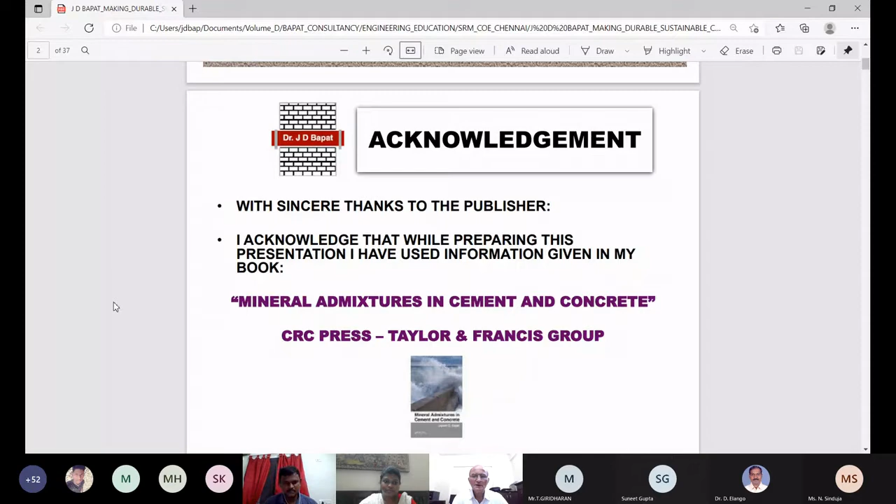What is the meaning of sustainability with regard to cement and concrete? It is conservation of materials and energy and minimization of emission of greenhouse gases and pollutants in all stages. What are the stages? Starting from quarrying of raw materials for cement manufacture, aggregate and transportation, materials handling, unit operations of size reduction, batching, blending, pyroprocessing, packaging and distribution at the cement plant till it reaches the user site. Then placing of concrete and minimization of wastages at all levels in the construction site are the key to ensure the sustainability.

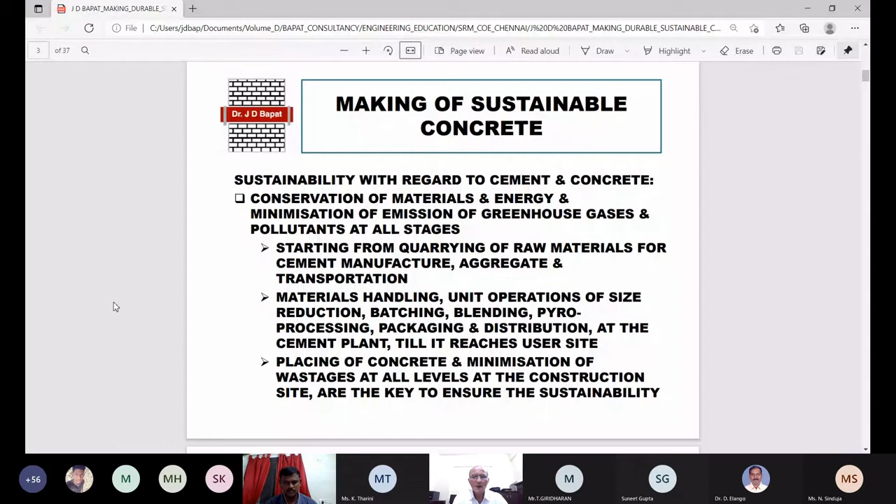Now we are moving on to the next slide.

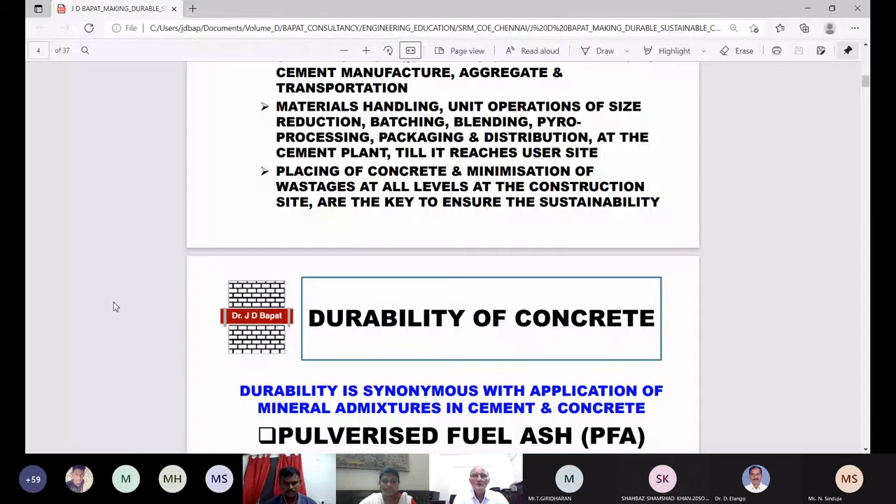Durability. Tarini, there are some people waiting in the lobby. I am getting a message. Sir, I'm admitting them, sir. Some people, sir, are waiting. Yeah, I'm admitting them. Yes, sir, you will admit them.

Durability is synonymous with the application of mineral admixtures in cement and concrete. Now, what are the mineral admixtures which are approved by IS 456-2000? So these are the 5 admixtures which I have given in my slide. They are approved by IS 456, namely pulverized fuel ash, PFA, blast furnace slag, BFS, silica fume, SF, rice husk ash, RHA, and metakaolin.

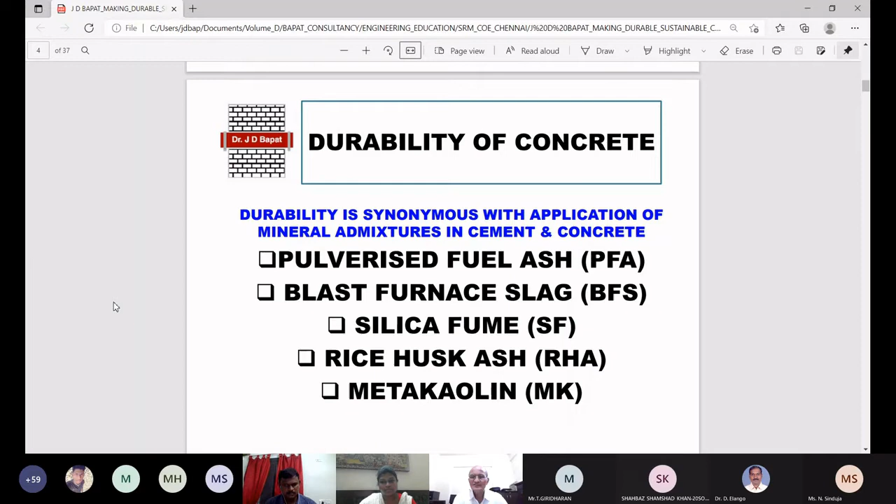When you add fly ash to cement, you manufacture Portland Pozzolana cement, PPC. When you add slag, you manufacture Portland slag cement.

For example, if you manufacture Portland cement, you consume let us say 100 units of thermal energy and 100 units of electrical energy. Now when you make PPC by adding 15% fly ash, the thermal energy comes down to 84, and electric energy is reduced to 89.

When you go to PSC, that is Portland slag cement, the thermal energy comes almost to half, and electric energy is again reduced by almost 25%. So there is a huge saving of thermal as well as electrical energy when you manufacture Portland Pozzolana and Portland slag cement.

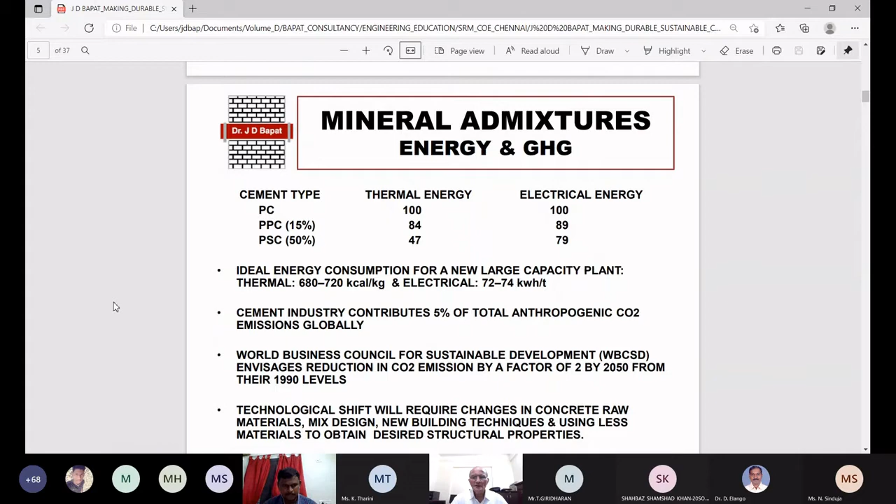Let us go ahead. Now, how do you define durability in structures? It is the ability of the structures to resist weathering action, chemical attack, and abrasion, while maintaining the minimum strength and other desired engineering properties.

Designing for strength and durability is synonymous to designing for sustainability. National standards are mostly prescriptive in nature. They define exposure conditions, design procedure, building materials and their applications, but do not assure minimum service life of structure. This is actually the fallacy of national standards, because they don't assure you what the minimum service life will be if you follow them.

Durability depends on the environment and the quality of concrete. These are the two major factors.

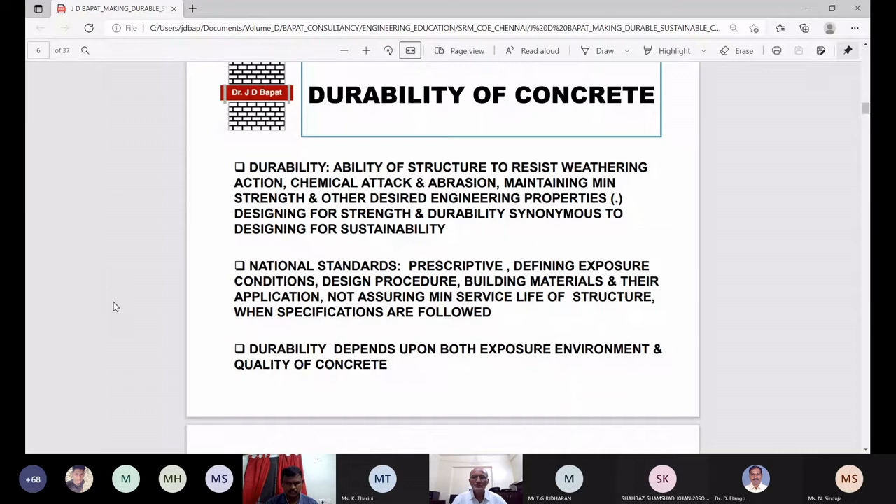Now, how do we design for durability? First, identification of the exposure conditions as per the standards—this is the first step. The next step is proper design procedure and materials choice, including concrete suitable for exposure conditions. Exposure conditions are defined in the standard, so you have to refer to it.

There are two approaches: one is prescriptive and another is performance based. Actually, the performance based approach is not followed by anybody because there are no standards available for it, or they are only partially available. Prescriptive standards are widely available all over the world, so most people follow the prescriptive standard.

The common factors in both approaches are acceptance of permeability as a criterion for durability, quality of construction work, and continuous maintenance of structures during use. These are the three criteria accepted by both approaches.

There are two major faults in concrete construction that can lead to loss of durability. What are those factors? Inadequate cover to reinforcement and inadequate compaction of cover concrete. These are the major factors.

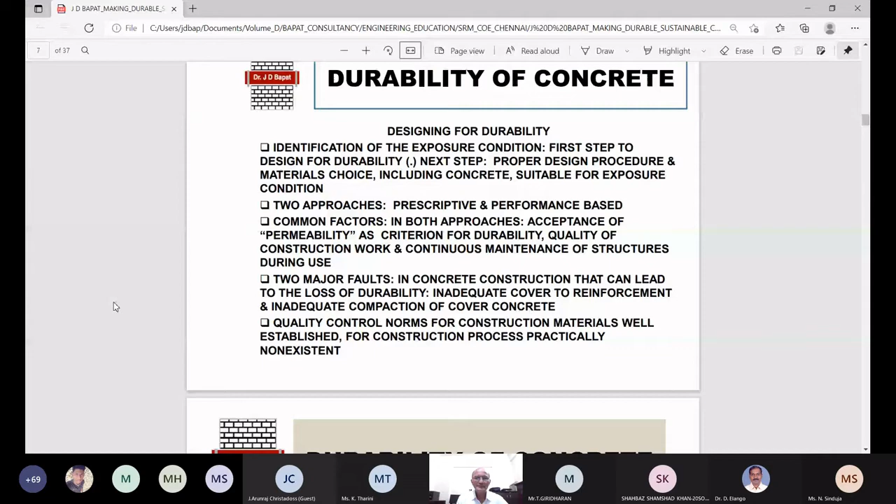Mineral admixtures impart durability and strength to concrete. I have already shown you the 5 admixtures approved by IS 456. Now I am coming to ASTM classification of fly ash. Why am I referring to both ASTM and IS? Because many parts of the world refer to ASTM standards, and ASTM standards are more comprehensive. So it is always better for you as civil engineers to know both ASTM and IS standards.

ASTM C618 and IS 3812 classify Portland fly ash, that is pulverized fly ash or FA, as follows: class F is obtained by burning anthracite coal, or known as grade 1 in IS 3812. Class C of ASTM is obtained by burning lignite coal, or grade 2 in IS 3812. So there is a relationship between the two standards. The former, grade 1 or class F, is pozzolanic, whereas the latter is both pozzolanic as well as cementitious. Later on we will see the difference between pozzolanic and cementitious.

It is also seen that grinding or size reduction operation improves the pozzolanic activity of pulverized fuel ash, PFA, when carried out in a controlled manner. 'Controlled manner' is a very important phrase.

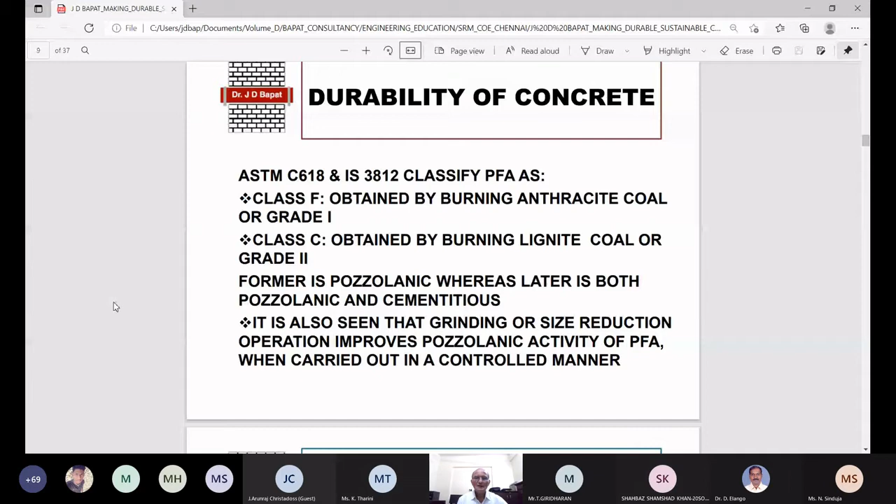Now I am coming to slag. We have seen fly ash, now I am coming to slag grades as per ASTM and the Indian standard.

ASTM C989-09 specifies 3 grades of GGBS by activity index. GGBS is ground granulated blast furnace slag. By activity index, the grades as per ASTM are 80, 100 and 120.

Now when you come to IS, this is a very recent standard, earlier it was not there. IS 16714 specifies minimum activity index of 75 and minimum glass content of 85%.

So you can see the difference. In ASTM standard, glass content is not specified, but activity indexes are specified as 80, 100 and 120, whereas as per Indian standard, 75 is actually the activity index. So there is some similarity between ASTM and IS standard over here.

Now activity, how do we define activity index? It is the average 28-day compressive strength of 50% slag plus 50% cement cubes, which we call SP, divided by the average compressive strength of reference cement cubes, that is Portland cement cubes, which we call P, multiplied by 100. So the formula is slag activity index equals SP upon P into 100.

You get the activity index. Now which is the best? As per ASTM, grade 120 represents the highest strength. Now what is the conceptual meaning of this 120? I will just tell you.

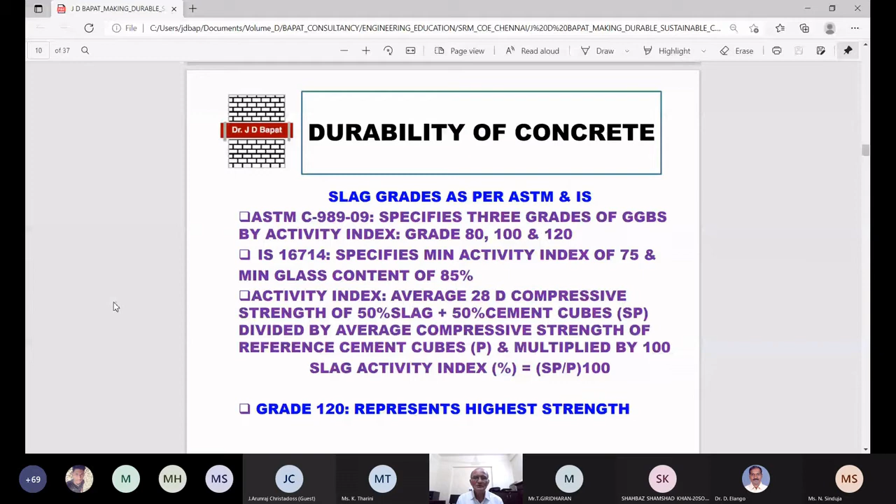So as you improve the grade, you will always see that the amount of material required is less. You are conserving material by using higher grades. Now, how do we analyze the concrete strength? This is shown in this slide.

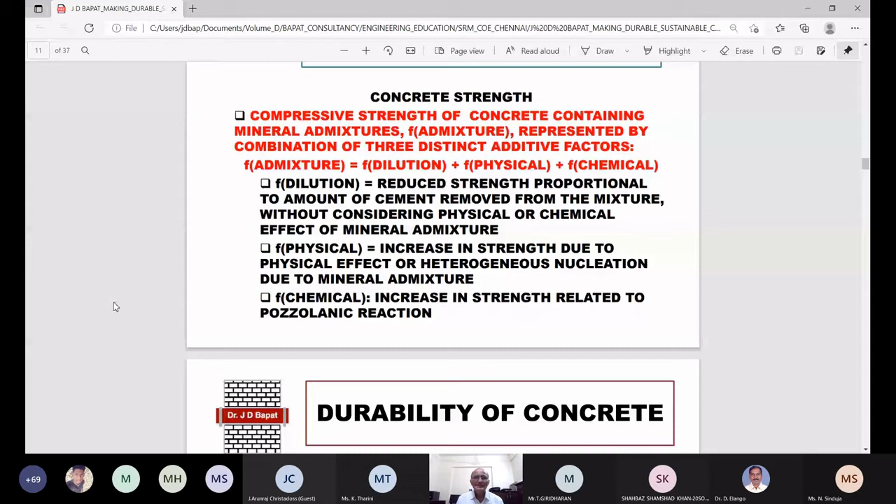Compressive strength of concrete containing mineral admixtures is represented by combination of 3 distinct additive factors. There is a small equation given over there: F admixture is equal to F dilution plus F physical plus F chemical.

Now what is F dilution? It is reduced strength proportional to the amount of cement removed from the mixture, without considering the physical and chemical effect of mineral admixture. It means that supposing you only remove the cement from your mixture, then there will be some strength reduction. So that is your F dilution, without considering the other 2 factors, namely F physical and F chemical.

Now what does this F physical and F chemical do? Let us see. F physical is the increase in strength due to physical effect, or heterogeneous nucleation due to mineral admixture. That is F physical. And chemical effect is the real effect, that is increase in strength related to pozzolanic reaction.

So from this equation you can see that F dilution has a negative sign, whereas F physical and F chemical have positive signs. Now when the summation of these 3 becomes positive, you will find that the strength of concrete using admixture will be higher than the strength of concrete using Portland cement. It's a very simple formula for all of you.

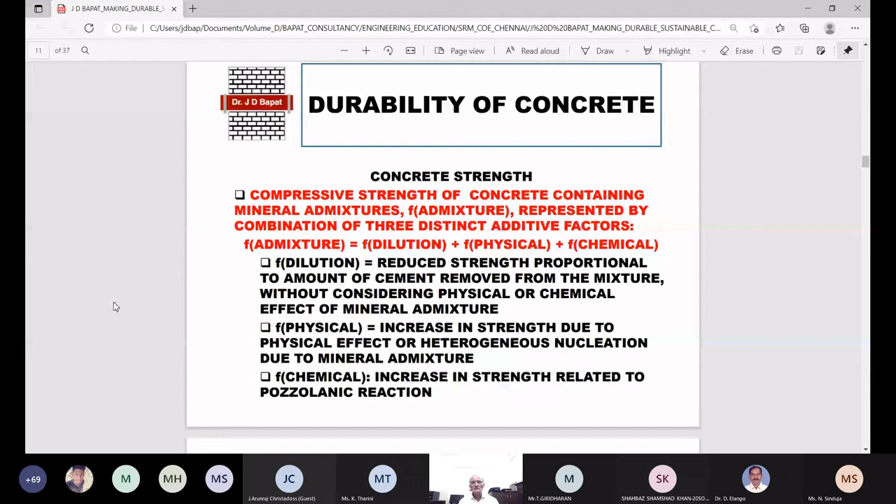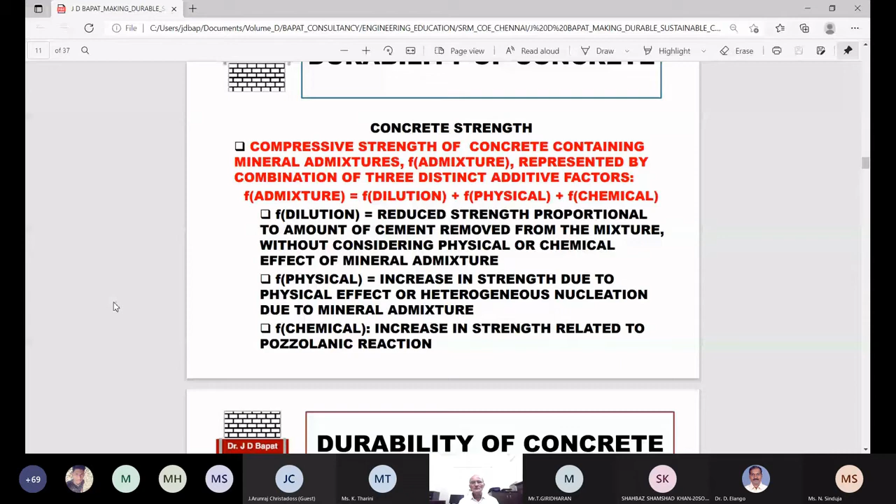See, in mechanical engineering there is one concept known as the ball bearing. Now what does ball bearing do in the machines? Ball bearings are actually reducing the friction in the machines. The same effect you will see here when you add fly ash in concrete. The fly ash addition will reduce friction between the aggregate particles and the cement particles.

What is the impact of reducing friction? There are 2 impacts. If you keep your water to cement ratio constant, then your workability will increase by addition of fly ash. If you want to keep the workability constant, then you can reduce the water to cement ratio. So both effects are beneficial for the concrete. So you have to decide what exactly you want, and accordingly you have to design your concrete mix.

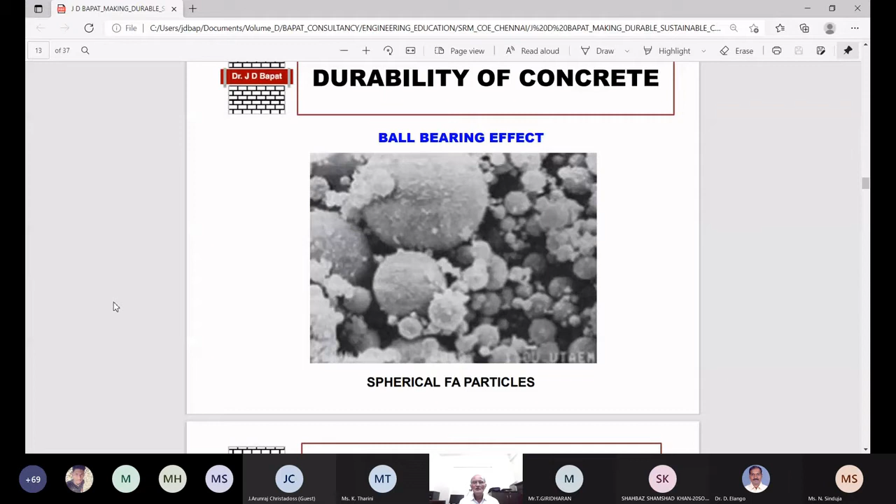Now let us see the size effect of fly ash. Now particle size of raw fly ash ranges mostly from 1 to 100 microns. So let us see how it affects the strength of the concrete. Now under 10 micron, it will contribute to early strength, that is 7-day and 28-day strength of concrete.

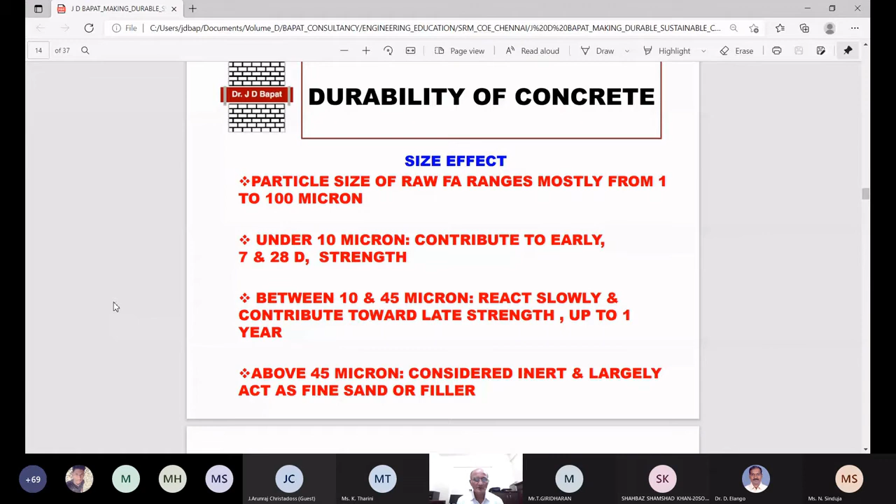Between 10 to 45 micron, they will react slowly and contribute towards late strength, that is up to 1 year of concrete. And above 45 micron, you will find it is considered as inert and largely acts as fine sand or filler. So different sizes will have different contributions toward the concrete strength.

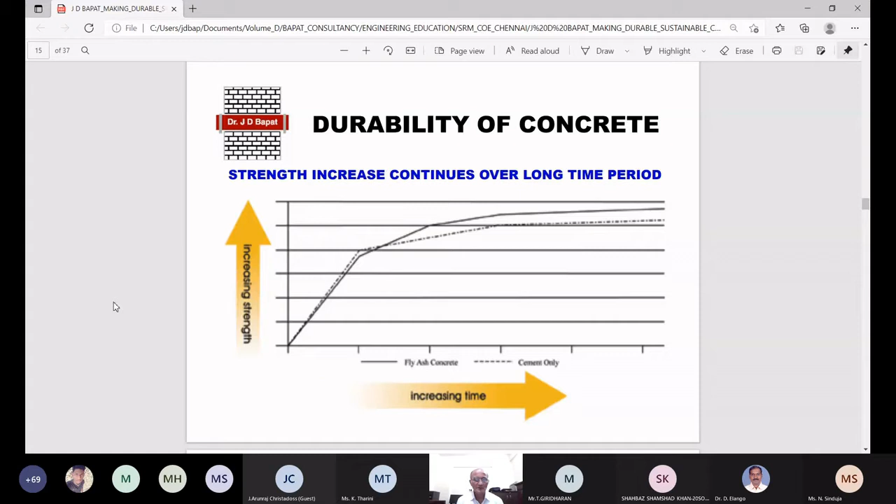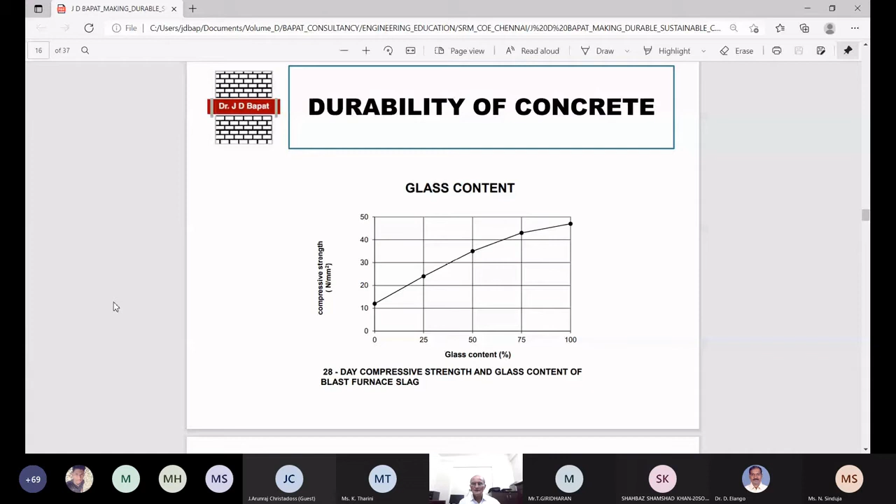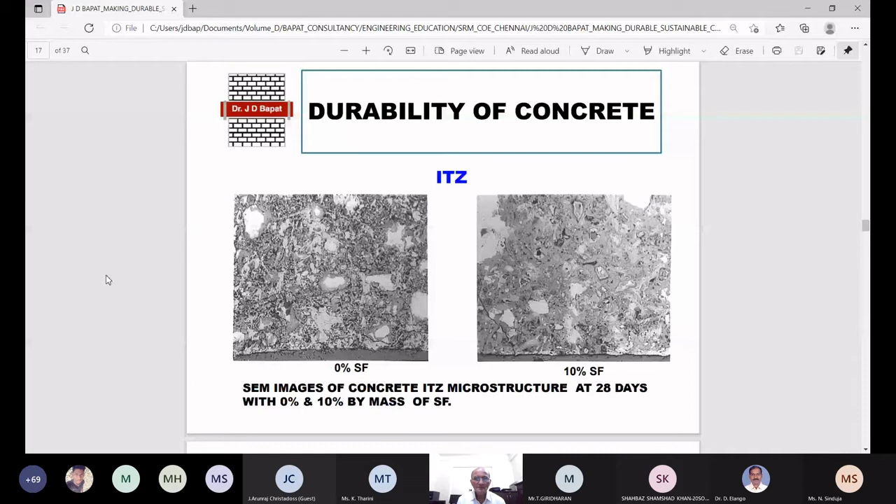Unlike the CSH which is produced by the hydration of cement, which is actually depositing on the cement particle, the CSH which is produced after the hydration of fly ash, GGBS or silica fume is away from the cement particle, and actually it goes to block the interconnection between the pores in the concrete. Very beneficial effect. It reduces the porosity of concrete actually.

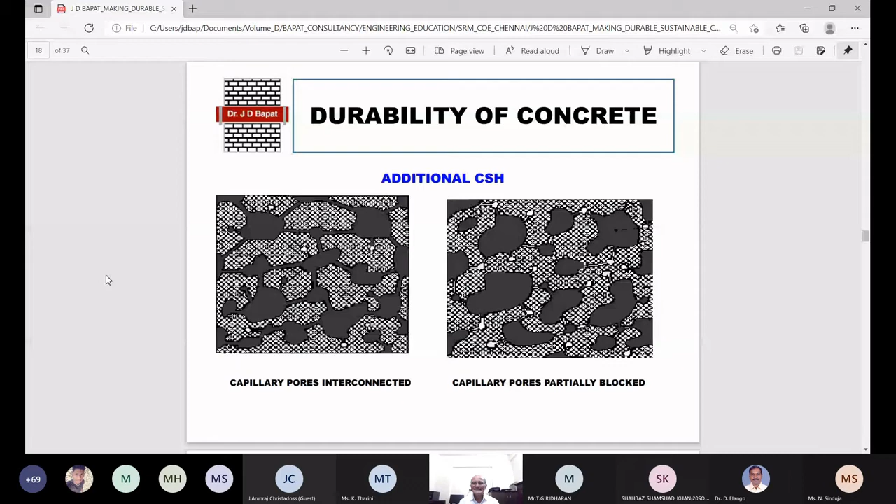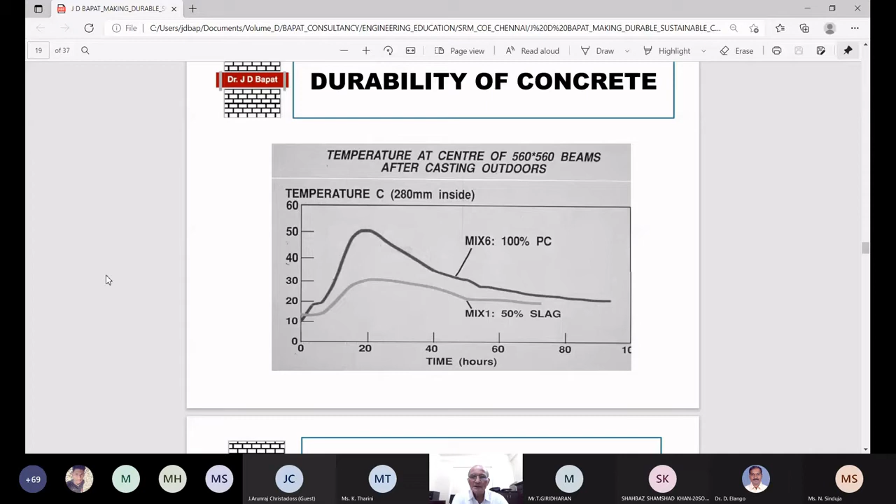Moisture loss prevention is important when your water to cement ratio is low, that is below 0.4, when cement has a high rate of strength development, and when concrete contains mineral admixtures. In all these three cases, curing is very, very important. Cannot be ignored. Adequate and continuous supply of water is necessary for long-term strength development and improved durability performance of concrete with mineral admixtures.

Now here I would like to tell you one more thing, that there are some manufacturers of polymers especially. They tell that if you add this particular chemical in your concrete, curing is not required. I actually conducted experiments on this particular area and I found that they are false claims. So far, curing has not been replaced by any other thing.

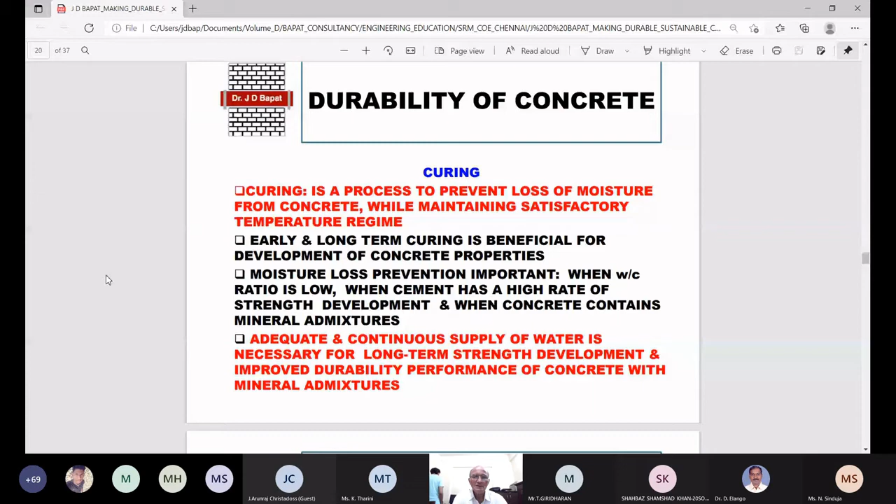Now I am coming to the subject of concrete deterioration. What are the various ways in which concrete gets deteriorated? The first is carbonation, which is very common in almost all concretes. Carbonation occurs with carbon dioxide, which is always available in our atmosphere. It increases with carbon dioxide concentration in the surroundings. The relative humidity, RH, of 50 to 80% is optimum for the propagation of carbonation.

IS 516 Part 5 Section 3, this is a very recent Indian standard. For your information, if you go to the Bureau of Indian Standards, BIS website, that website allows you to download any standard free of cost. Please note this is very important. You can download the latest version of any Indian standard from the website of Bureau of Indian Standards. You only have to register there and you can download a PDF file of the particular standard. So this IS 516 Part 5 Section 3 is a recent addition in the standard. It gives you the test method to evaluate the carbonation penetration depth in concrete.

Now Jan Bijen is a scientist, and some of his colleagues carried out some experimentation. What they found, a large scale study on durability of structures built along the Dutch coast. This was done in the Netherlands with BFS, that is blast furnace slag concrete. Structures included sluices, piers and quays ranging in age from 3 to 63 years. In 48 out of 51 structures, the carbonation depth was less than 5 mm. So people always say that if you use GGBS or blast furnace slag in your cement, the carbonation will be more. This finding of Dr. Jan Bijen has proved that no such thing happens in actual cases. Then early and longer curing gives better carbonation resistance. Please remember this, especially in concrete with mineral admixtures.

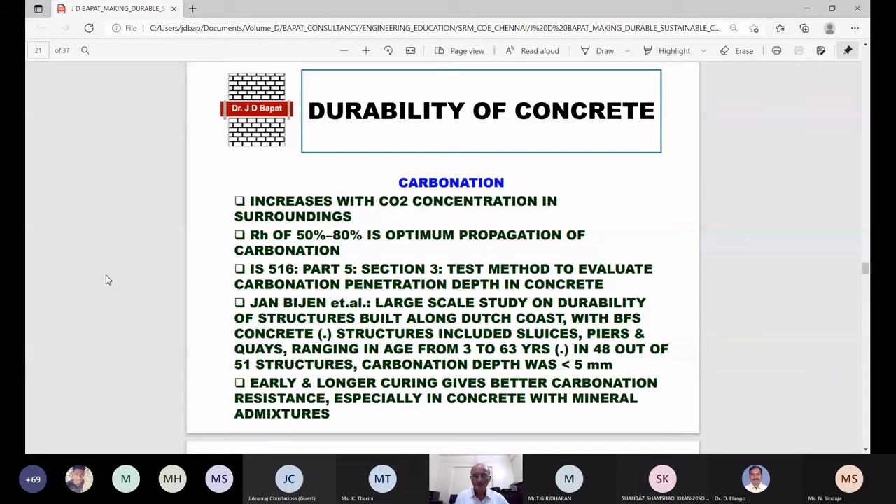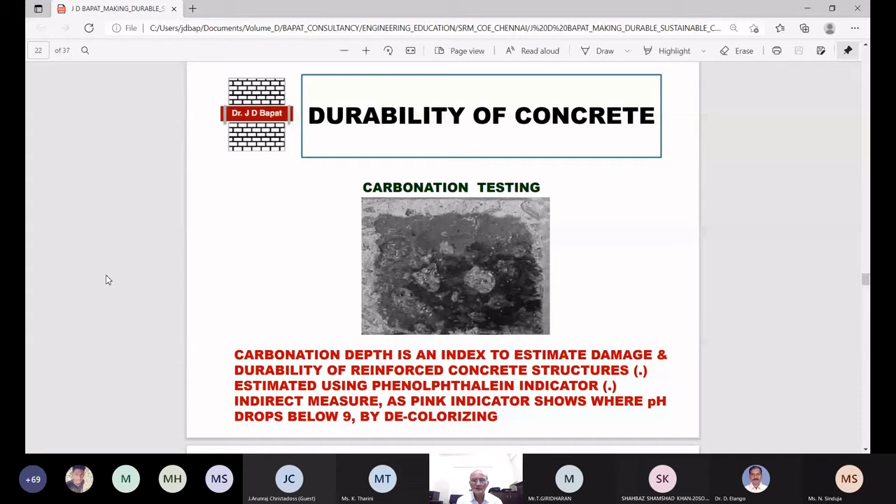Next slide. Larger quantities of fly ash, that is more than 25%, delay setting and early strength, but this can be tackled very effectively by the superplasticizers which are nowadays available in the market. Wherever possible, specifying 56 days strength instead of 28 days strength can result in better optimization of the mixture. That means you can optimize the quantity of fly ash which will replace cement if the structural engineer at the site allows you to use 56 days strength instead of 28 days strength. For reactive aggregates, it is better to perform a standard expansion test to determine the limit of fly ash addition.

What is the meaning of reactive aggregates? Now, in some parts of the country, the aggregates are reactive. That means they give rise to alkali aggregate reaction, or sometimes people call it alkali silica reaction, ASR. Now, when you have reactive aggregates, it is always better to perform the standard expansion test to determine the limit of fly ash addition there. Actually, fly ash reduces the alkali silica reaction incidence. To control ASR, better to keep the alkali content of fly ash below 1.5% Na2O equivalent.

So this is the normal way of expressing alkali content in cement as well as the admixture. You always express it in terms of Na2O equivalent as per IS 3812. So it should always be less than 1.5%.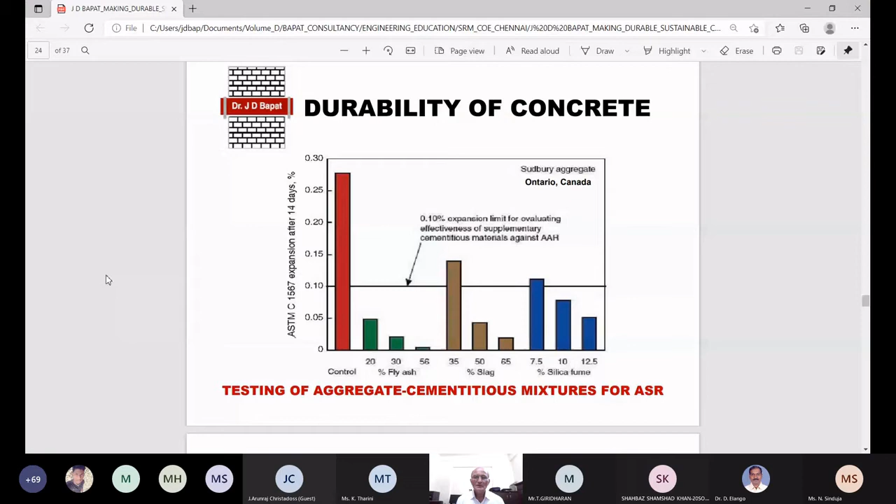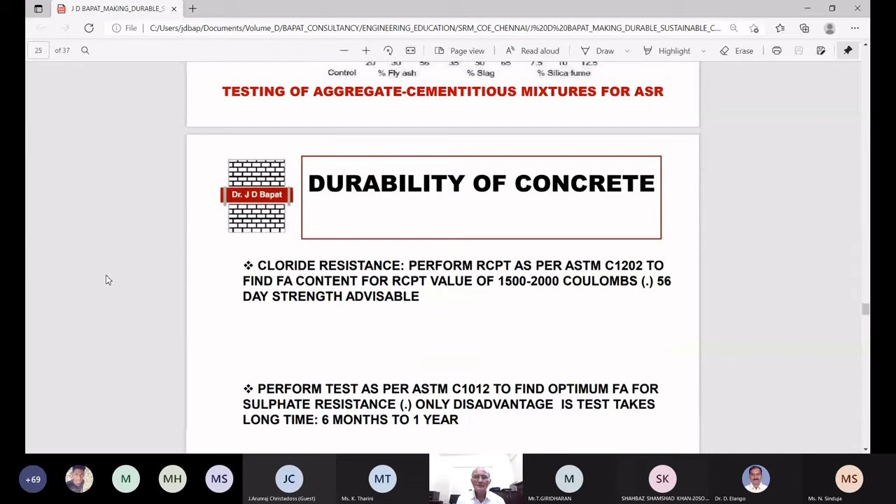Now for chloride resistance. Now why chloride resistance? Because chloride causes corrosion. Corrosion of what? Corrosion of reinforcement in concrete. Now chloride is a very harmful chemical. And then we have to take care of the chloride resistance of concrete in every concrete structure, especially underground structures or the structures which are built along the marine coast or in the marine atmosphere, I will say.

Now, perform RCPT as per ASTM C1202. So I indicated two things over there. One is RCPT. What is the meaning of RCPT? It is rapid chloride penetration test. To be very correct, it is rapid chloride ion penetration test, RCPT, as per ASTM C1202, to find fly ash content for RCPT value. Now what is the RCPT value? Acceptable RCPT value for good chloride resistance is 1500 to 2000 coulombs. And then, as I have already told you earlier, 56 days strength is always desirable, provided your structural engineer permits you.

Perform the test as per ASTM C1012 to find optimum fly ash for sulfate resistance. So chloride resistance we have seen, now sulfate resistance. This is again very important for marine structures, both chloride as well as sulfate. Only disadvantage with this ASTM C1012 is that the test takes a long time. It takes up to 1 year. So you have to perform it a little early when you are going for marine structures.

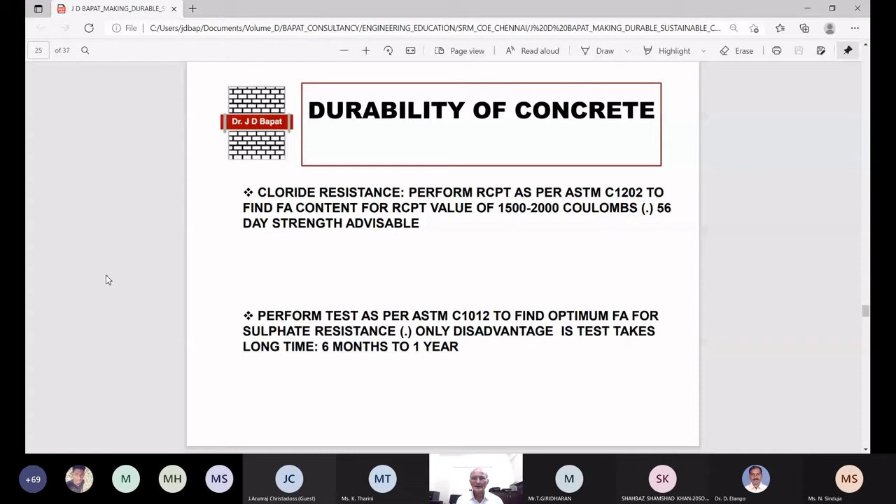So how do you calculate these 65 coulombs? You multiply 0.003 by 360 into 60, because you have to convert everything into seconds. So you will get the figure of 65 coulombs over there. So if you have a 65 coulombs RCPT value, then you can say that your concrete has very good chloride resistance, a very good corrosion resistance.

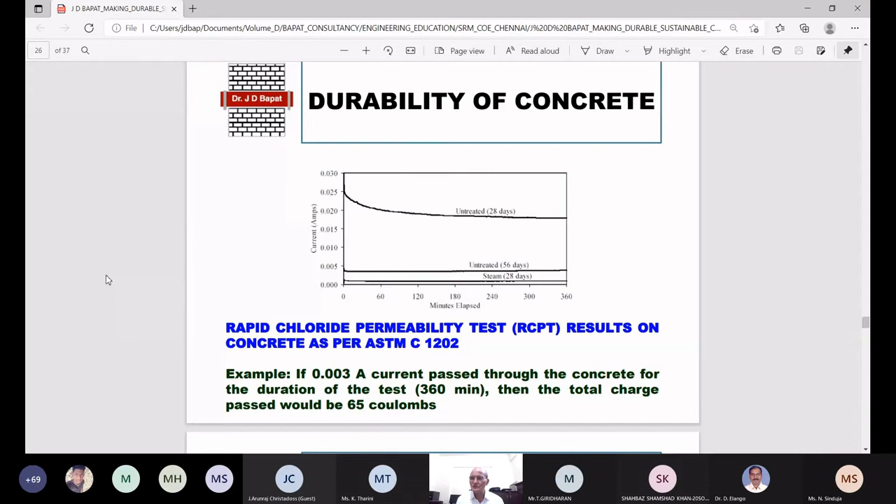Now this is the slide on sulfate resistance. The expansion of cement mortar blended with fly ash exposed to sodium sulfate. Sodium sulfate is very frequently found in seawater environment, as per ASTM C1012. The 180-day expansion limit as fixed by C1012 is 0.1% for the moderate and 0.05% for the severe sulfate environment. You have to go back and study all these standards, then you will understand what I am saying properly.

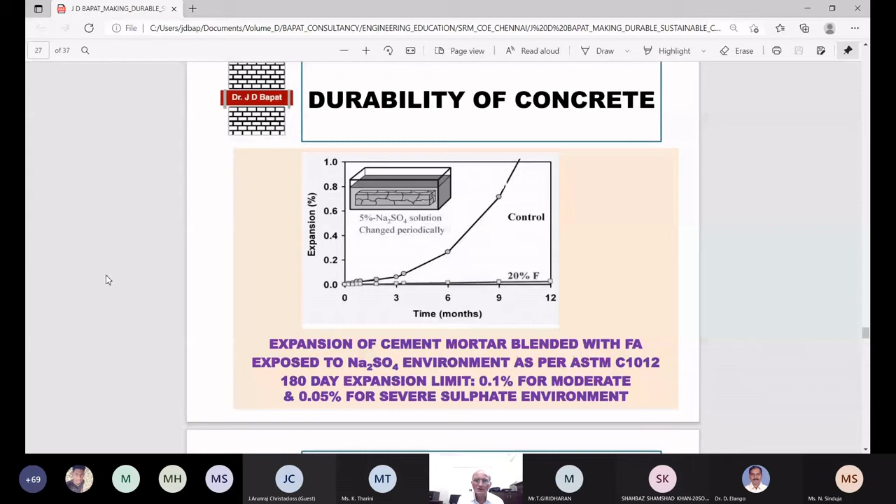Now coming to our Indian standard, IS 456-2000 is normally followed in the structures in our country. They are also specified in the tenders. IS 456 on durability, what does it say?

Permeability is identified as the single most important parameter affecting durability. It stresses the quality of constituents, binder content, that is binder is cement as well as the admixture, water to cement ratio, and workmanship, namely compaction, curing, and cover to the embedded steel. To this, I will also add the curing in workmanship.

Total water soluble sulfate is restricted to 4% of cement as per IS 456. The Portland slag cement as per IS 455 with slag greater than 50% is recommended for the combined sulfate and chloride attack. This is very important because in sea water or marine environment, and also in the soils, marine soils, both sulfate as well as chloride is available. So IS 456 recommends the use of Portland slag cement with more than 50% GGBS or slag.

Total acid soluble chloride is restricted to 0.4 kg per meter cube for steam cured and pre-stressed concrete and 0.6 kg per meter cube for reinforced concrete. Total alkali content is restricted to 0.6 in Portland cement. These are all the things which are specified in IS 456.

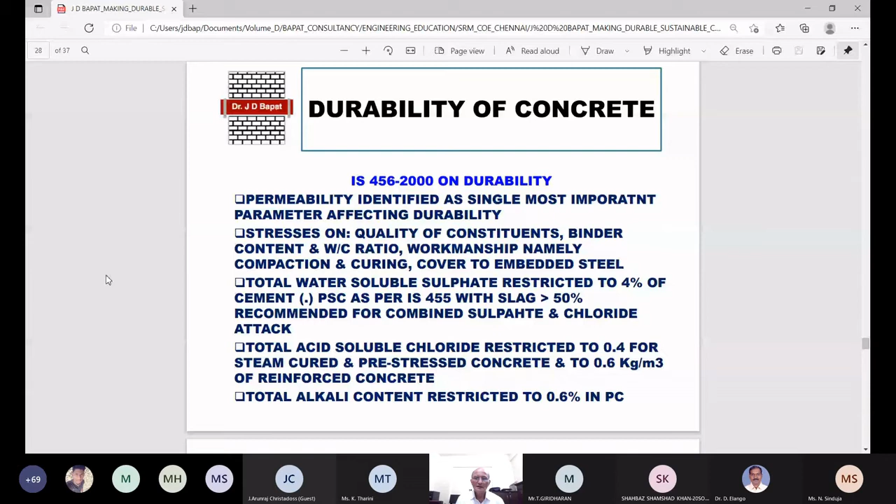Now let us see some examples of durable and sustainable concrete. One typical example I want to mention over here is carbon cure technology, that is recycling of carbon dioxide in the fresh concrete.

Do I have some time, organizers? I think I have some time. Can I continue for another 10 minutes? Yes, sir. Okay. Now we are discussing the carbon cure technology.

So World Business Council for Sustainable Development, WBCSD, recommends the reduction of carbon dioxide emission by 50% by 2050 from the 1990 level. We have already seen this. It is a typo error; it is 1990 level, not 1995 level. The greatest proportion of projected carbon reduction, that is 56% as per WBCSD, is expected from the implementation of carbon capture and sequestration, that is CCS technologies.

But unfortunately, these technologies have not yet been fully developed and commercialized. So experience showed over a period of time, when WBCSD gave the recommendation, it was in 1995. Now we are in 2020. So the experience showed CCS is no longer the most promising technology. So carbon cure has come up with a better, new technology, which introduces recycled carbon dioxide coming from chimney or from atmosphere, from wherever you get it, into fresh concrete without compromising the performance of concrete.

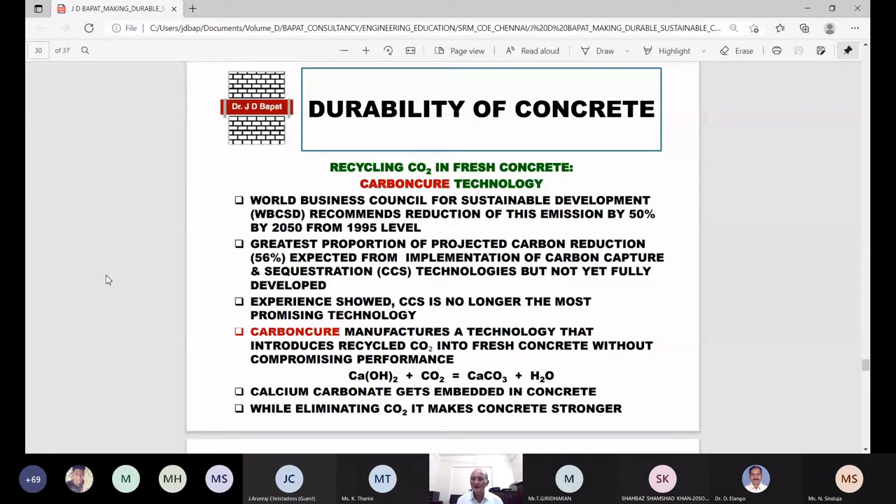Second example is high volume fly ash cement. And then we'll go to third straight away because there is less time available. So let us see. Now let us see this, because there is some R&D scope, because I think your faculty will be interested in R&D. I will just tell you in very short.

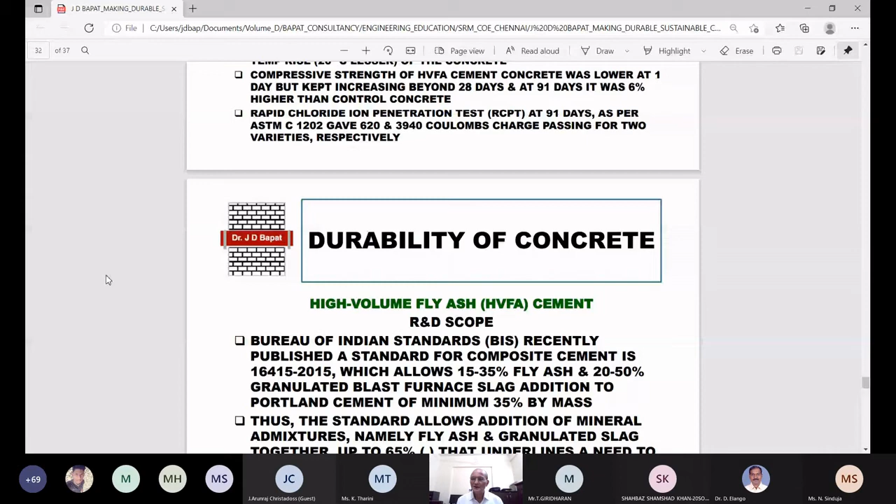This high volume fly ash cement was developed by Electric Power Research Institute (EPRI) USA in partnership with Canada Center for Mineral and Energy Technology (CANMET). They developed an optimal procedure for intergrinding clinker, which is actually raw cement in the cement factory, and fly ash to produce acceptable cements containing high volume of ASTM class F fly ash, more than 50%. Blended cements comprised approximately 55% fly ash interground with 45% ASTM type 1 cement clinker with small amounts of gypsum and a dry superplasticizer.

For similar slump, the results are like this. For similar slump and air content, use of HVFA, that is high volume fly ash cement in concrete, increases the dosage of superplasticizer and air entraining admixture, delays both initial setting time, IST, and final setting time, FST, and significantly decreases the temperature rise of the concrete by 20 degrees centigrade or more. The last line is very significant, that you have reduced the temperature rise in concrete by more than 20 degrees centigrade.

Compressive strength of high volume fly ash cement concrete was lower at 1 day, but kept on increasing beyond 28 days, and at 91 days it was 6% higher than the control concrete made from Portland cement. Rapid chloride ion penetration test RCPT value at 91 days as per ASTM C1202 gave the value of 620 as against 3940 for Portland cement concrete. So you can see the difference between RCPT values.

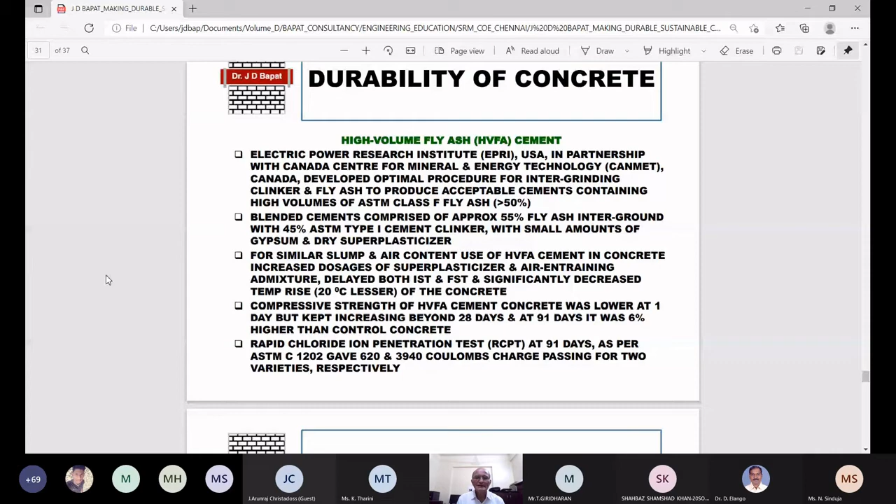Now, what is the R&D scope in this? Maybe important for people who are doing R&D in concrete. Bureau of Indian Standards (BIS) recently published a standard for composite cement, that is IS 16415:2015, a very recent standard, which allows 15 to 35% of fly ash and 20 to 50% of granulated blast furnace slag addition to Portland cement of minimum 35% by mass. So the standard allows addition of mineral admixtures, namely fly ash plus granulated slag together, up to 65%. We are already allowed in the Indian standard.

That underlies a need to conduct laboratory and plant scale experiments which you can do on HVFA cement in India. So there is a small difference. That means instead of combining fly ash and granulated slag, you add only 65% or 55% fly ash. If the development is successful, the Indian standard can be suitably modified to accommodate the change. So whatever people did in Canada can also be done in India by conducting the laboratory and the large scale trials, and you can develop a new cement, and also it can be added in the Indian standard later. So this is the R&D scope.

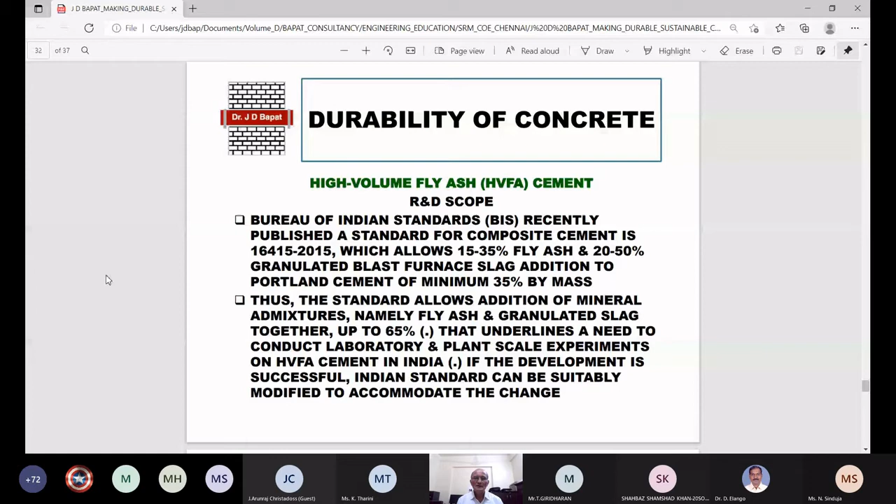So I'm moving on to the next thing very quickly. This is also high volume fly ash concrete. So I'm just going ahead.

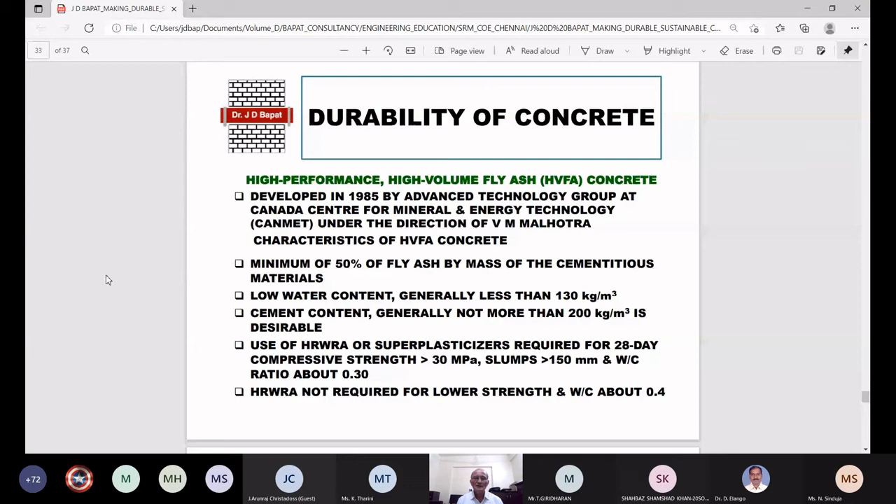So, recycling of lagoon ash. See, recycling of lagoon ash is very, very important because there is a very large quantity of lagoon ash available in our country. Millions of tons, I will say. As a general practice in Indian thermal power plants, fly ash and bottom ash coming from the boiler are mixed with water and transported to ash ponds. That ash is called lagoon ash or pond ash. It is non-standard ash and cannot be added to cement or concrete. It is not allowed. In 2019-20, very recently, 95.1 million tons of ash was dumped in lagoons.

You can imagine. Lagoons create huge land, water, and air pollution. So if you want to make sustainable concrete, you have to use this lagoon ash. Any effort towards large-scale utilization of this ash will go a long way in sustainable development of thermal power generation as well as the construction industry. The effective way to utilize pond ash is to add it in the concrete in high volumes, that is more than 50%, as a partial replacement of Portland cement.

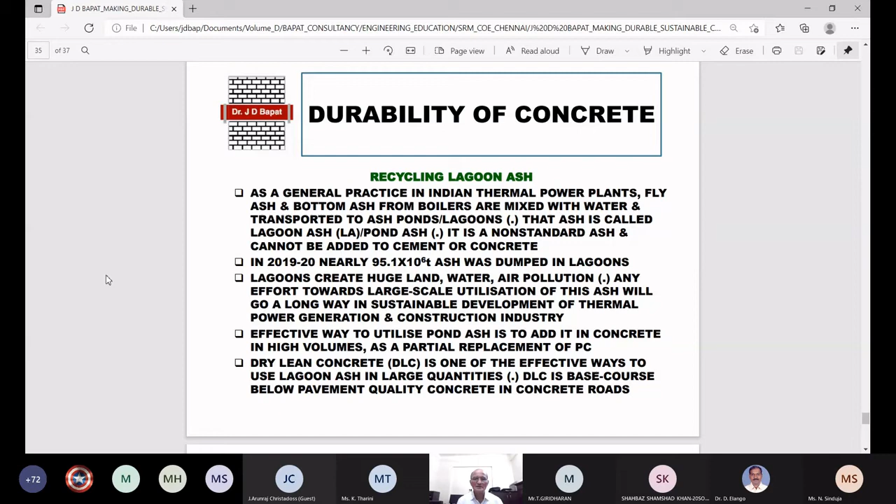Dry lean concrete, that is DLC, is one of the effective ways to use lagoon ash in large quantities. DLC is a base course below pavement quality concrete in concrete roads. Some of you may be knowing this. Now, I am quoting a research which I have myself done. In 2006, myself and some of my colleagues conducted successful laboratory trials on high volume lagoon ash DLC. I have given the reference over there for those who want to refer to this paper. It has been published in the Journal of Materials in Civil Engineering, an American Society of Civil Engineers journal, in 2006. So you can refer to this paper.

The DLC was prepared according to the specification given by the Ministry of Road Transport and Highways, MORTH, and the Indian Roads Congress, IRC. DLC prepared with 55% replacement of cement with lagoon ash satisfied the provisions of MORTH and IRC. The Ministry of Road Transport and Highways, Government of India has undertaken construction of national highways on a massive scale. All of us know this. Portland cement concrete is extensively used for the construction work. Assuming lagoon ash based DLC is used as a base course of all these concrete roads, I assume a thickness of 150 mm. In the construction of these highways, the quantity of lagoon ash used will be about 300. I calculated it actually. It is about 319 tons per kilometer of a 4-lane road constructed with 55% cement replaced by lagoon ash. It's a very huge saving and utilization of lagoon ash here.